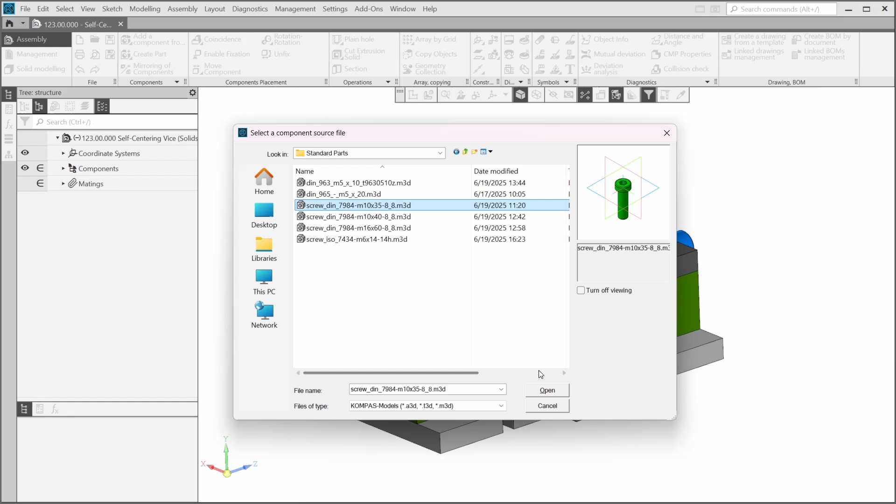In this lesson, we'll start adding fasteners to the self-centering vise assembly. Let's add the first screw. Open the standard parts folder, find the screw with a diameter of 10 and a length of 35. Click Open. Then, by matings, place the first screw in the hole of the clamp that we inserted first using two matings.

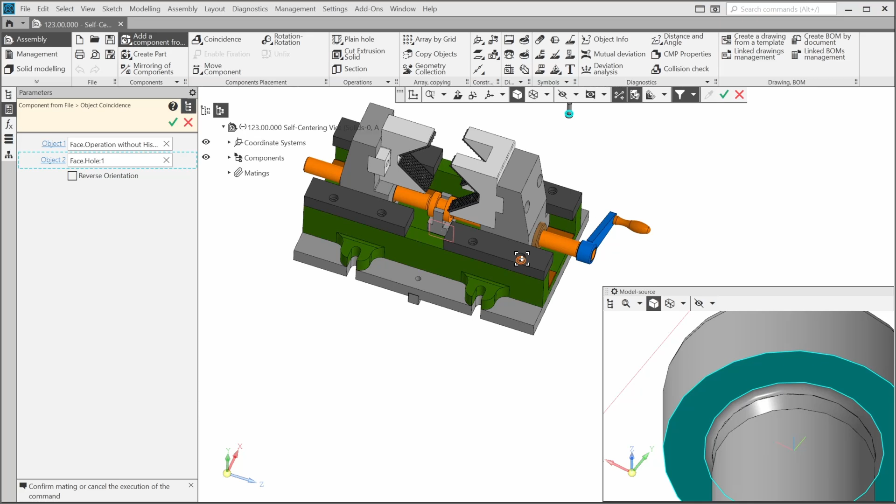Coincidence for the screw head face and the hole plane face. I need to reverse the screw orientation here. And coaxial for the screw cylindrical face and the hole cylindrical face. Confirm insertion.

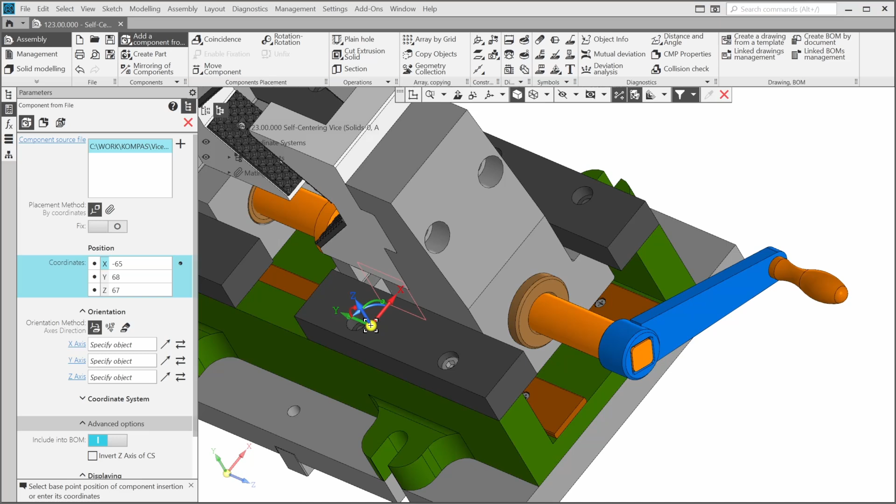You can insert the next screw into the second hole the same way, or you can use the fact that we created the second hole by mirroring the first hole. Display the design history to find the mirrored array. It might be difficult to find it in the structural representation because we have 4 identical clamps. It's easier to select the clamp in the graphic area than in the tree.

Select any element of it and click Select Component in the context menu to select the whole component, not just one element of it. After that, you'll see that the clamp is selected in the tree. Open its design history. There you will find the mirrored array we need. I'll press Escape to deselect it.

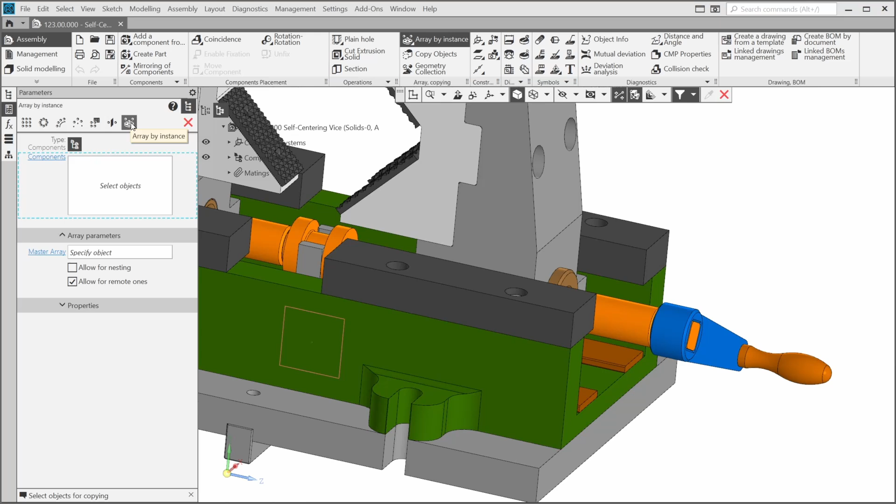Start the Array by Grid command and select the Array by Instance command on the Parameters panel. While the Components field is active, select the first screw in the graphic area. Activate the Master Array field. Display the additional tree if it isn't displayed. I should go to the design history here too.

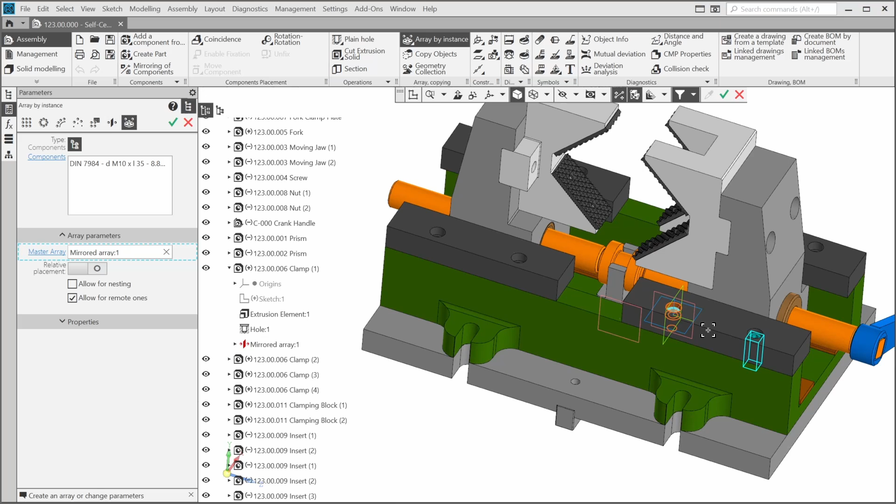Select our mirrored array. You'll see the preview. I like it. Confirm. Repeat the same for the adjacent clamp yourself. Pause this video while you do this.

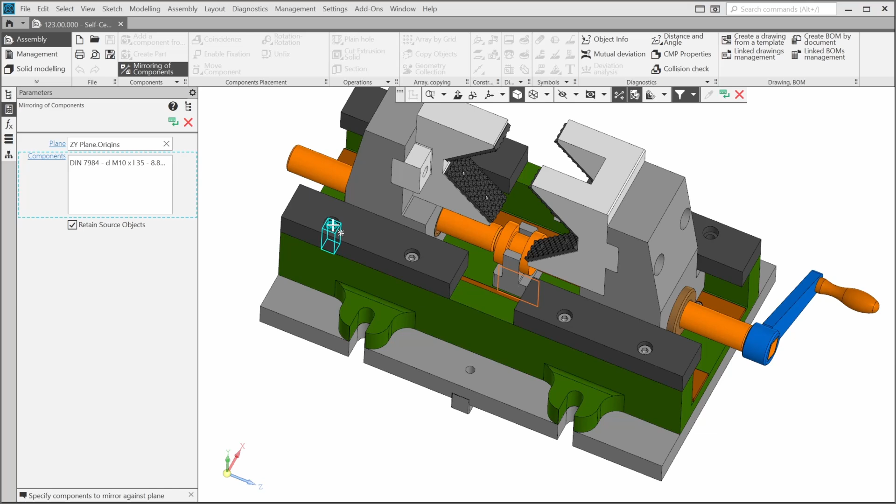Let's use the Mirroring of Components command to insert the screw into the holes of the clamps located opposite. Run the command. Since the plane field is active, select the ZY plane as the symmetry plane. Now the Components field is active and you can select the screws one by one. If you accidentally selected a wrong object, you can delete it in the Components field.

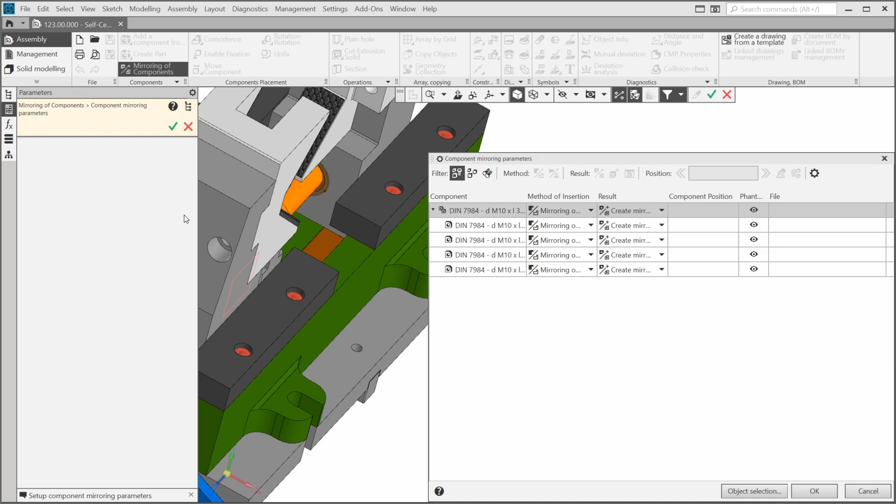I'll rotate the view to see the preview. Click the green button. Select Symmetric Component Placement for all screws. Switch to the proper position. Click OK.

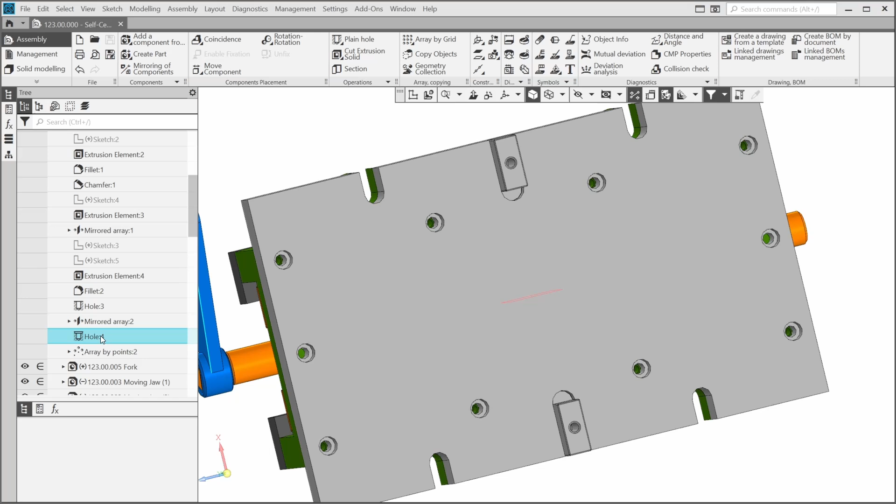Let's insert the same screw into the holes of the fork clamp plate. We'll use the Array by Instance command for this. First, we should insert the screw into the first hole of the array. I'll go to the design history to find it. This one. Click Add a component from a file. Select the same screw. Open.

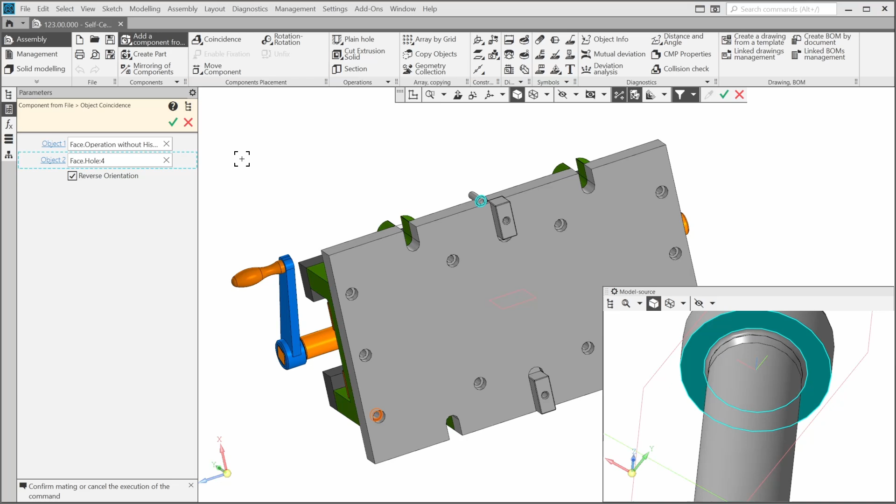By matings. Coincidence: the screw plane face and the hole plane face. Reverse orientation. You can confirm by pressing the mouse wheel. The screw cylindrical face, the hole cylindrical face, coaxial. Confirm insertion. Stop the command.

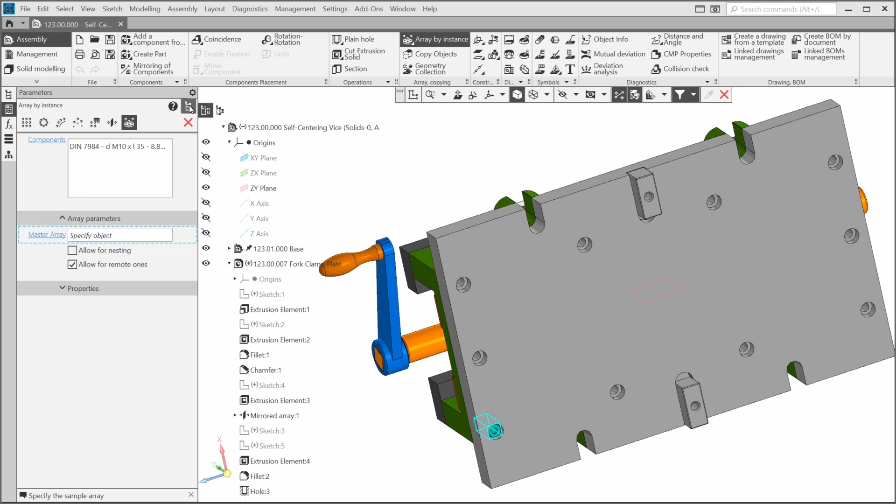Start Array by Instance. Select the screw you've just added. Activate the Master Array field. Select the array of the plate holes. If you're satisfied with the preview, as I am now, confirm. Stop the command.

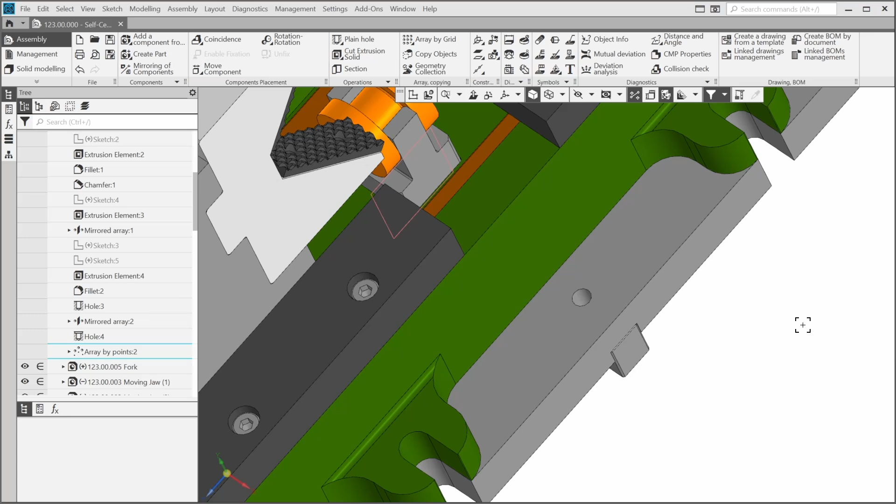The next screws that we're going to insert will be the ones that hold the clamping blocks. First, for this place. They will be almost the same as the previous, but slightly longer. Add the screw with a diameter of 10 and a length of 40.

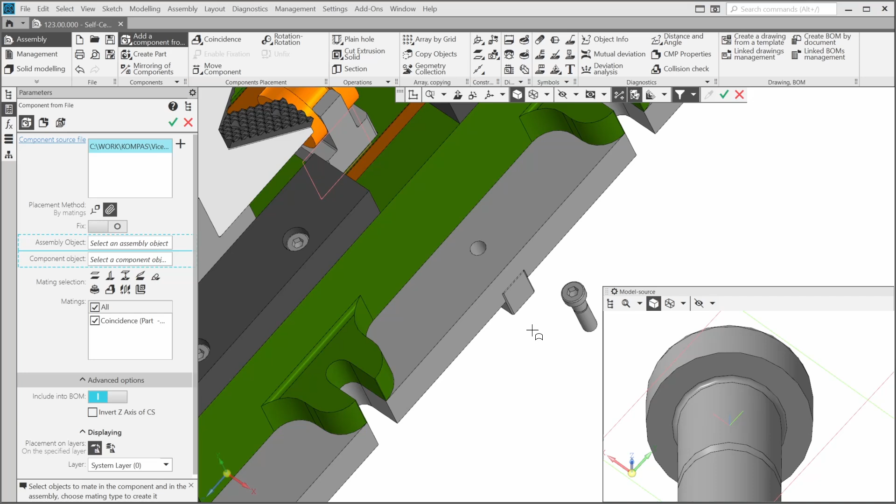By matings, coincidence, the screw plane face and the plate plane face. Confirm. The screw cylindrical face, the hole cylindrical face, coaxial. Confirm insertion. And repeat the same for the second screw on the other side.

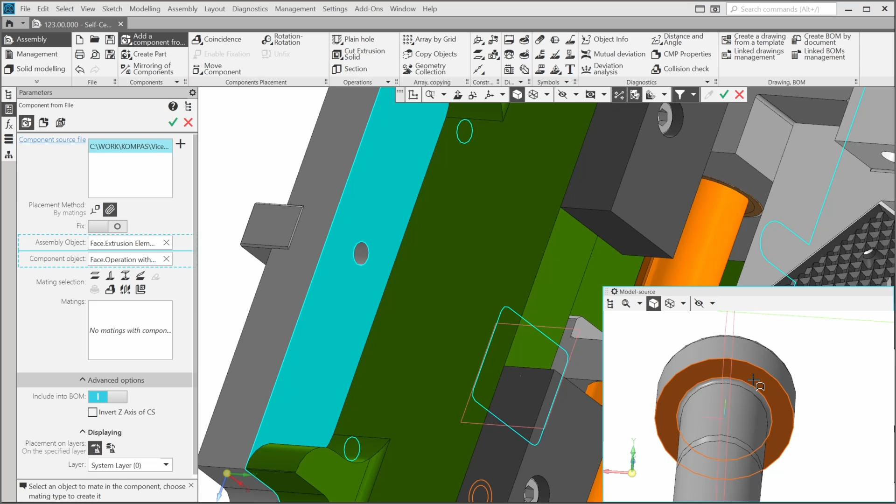I can see my screw. Anyway, I'll be able to correct its orientation later, so I can continue. It's OK. Confirm and stop the command.

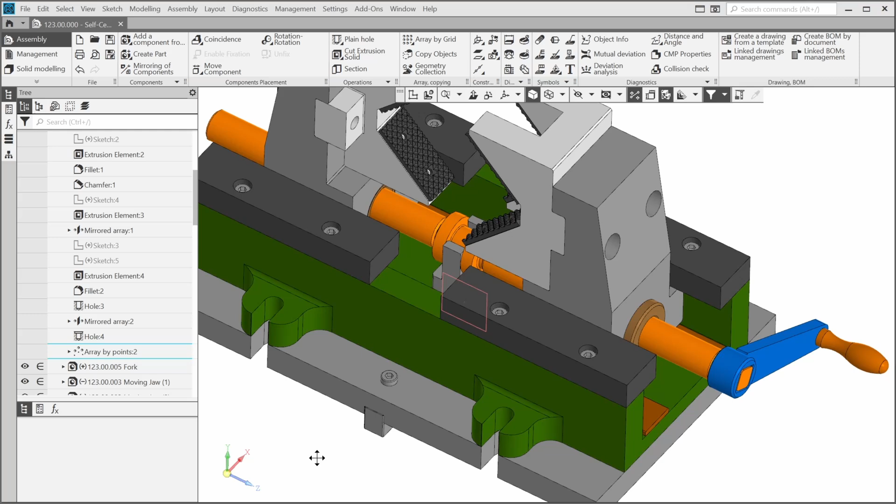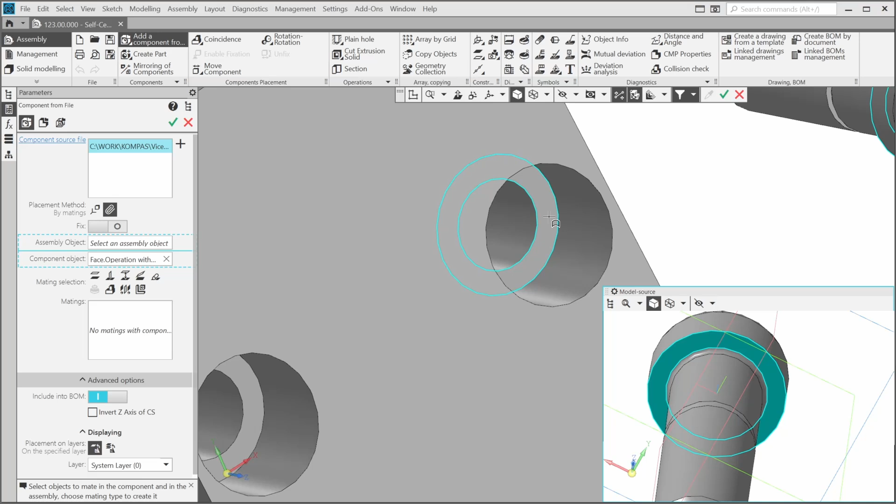The next screw will be the same, but with different dimensions. We'll place 4 of these screws in the jaws holes. Open the screw with a diameter of 16 and a length of 60. Note that you can also select by mating in the context menu. Add coincidence. And coaxial. Confirm.

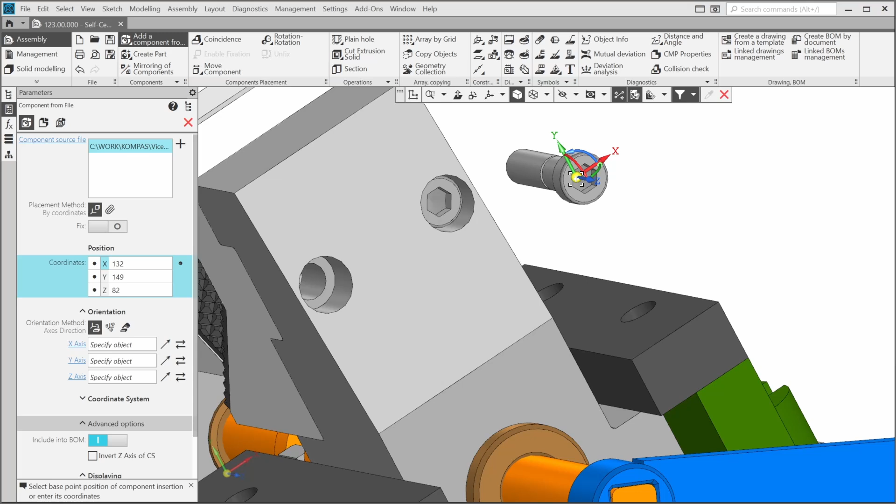Insert the 3 remaining screws into the jaws holes yourself. If you encounter a problem or want to check your work, you can find the file with the result in the File tab of the course page.